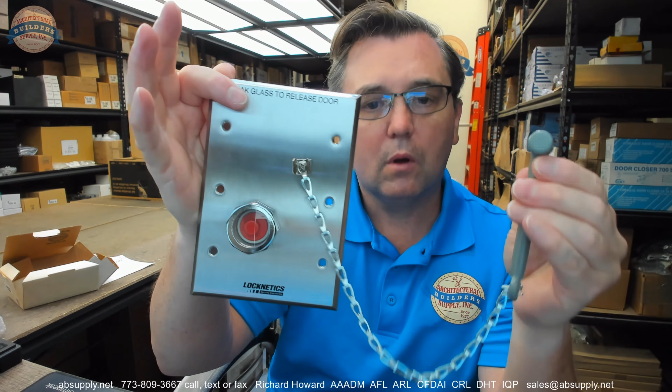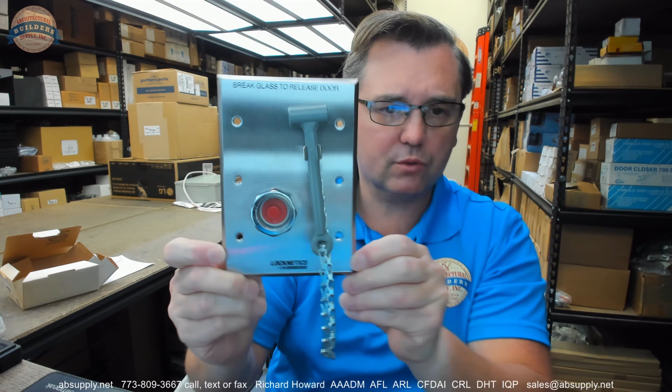Yeah, there'd be no trouble with this breaking that glass. It's a lot heavier than it looks, that's for sure. I can't really say how much force it would take to break that, but nonetheless. There it is. Break glass to release door. We'll snap the hammer back in place. The hammer and the chain are not available replacement parts. I've had that question in the past. The break glass, however, you can purchase, and I believe it's sold in a package of 5. Okay, right there.

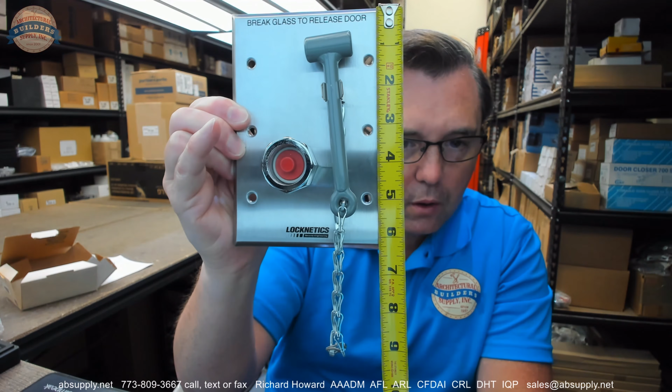Now, let's take some dimensions of the unit itself. That's 6 3/8, about 4 1/2 or so. It's going to be obviously a very similar, triple gang box sort of mount that you're going to use for this. So typical and common material. Now, the rest of the components that are here, I don't believe I showed you the back. We're going to go over the wiring diagram in a moment as well.

Okay. Now the balance of the components that are included here are going to be screws for getting everything attached. 6 of these machine screws for attaching the unit to the gang box. We'll put the material back in. There are only 3 break glasses here. I would have to assume that that's what's standard, even though a replacement pack will have more than 3. Again, I believe it's 5.

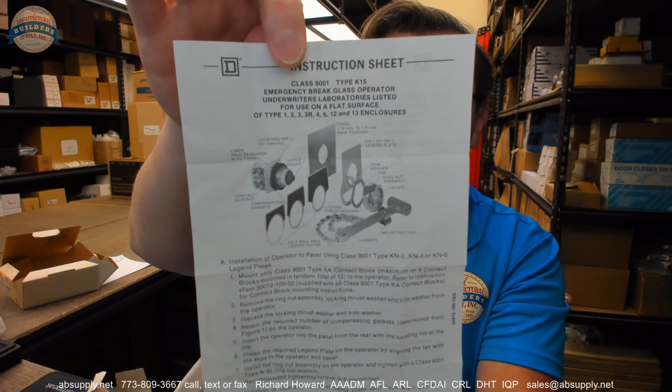Included is an instruction sheet on how to service the break glass, which is also linked to down below in this video. It basically involves unthreading the nut that's on the outside here. That's all that servicing really requires. Yep, that's it. Your break glass is here, and that will come out. Takes a little bit of force to thread it on because that switch is spring-loaded and underneath the glass. So that goes back together nice.

Okay, so let's switch now to the screen view where we can take a look at all of the supporting documentation. Okay, so here's the item that we are looking at. The Locknetics 740. You can view the other options as well. 740, 741, 742. Okay, so the 740. Surface mount in a standard 3-gang enclosure. So typical, sort of industry standard material that this will bolt to. Compatible with all fail-safe type electronic locking systems. An effective alternative to a standard pull box.

Let's back up to this. Compatible with all fail-safe. So what's happening here is, if you recall, I said that button was under tension. So as I rotated the nut to get to the break glass, the button came out. So what's happening is the glass is actually keeping the normally open switch in a closed position so that there's continuity through the circuit. But as soon as you break that, that's going to fail safe or open the circuit. So it's a normally open circuit.

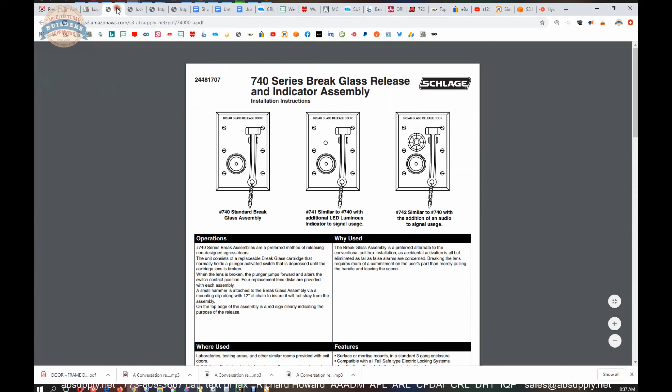The small hammer is attached to the break glass assembly via a mounting clip with a 12-inch chain to ensure it does not detach from the assembly. So there you go. So we have series instructions, and then there are additional instructions also that we'll be able to review. And let's go through them one at a time. There should be 4 documents. So the installation instructions, the 740 series,

this is all a review of what we just discussed. Why used? We just discussed that as well, but it goes on to say that the break glass assembly is a preferred alternate to the conventional pull box installation, as accidental activation is all but eliminated as far as false alarms are concerned. Breaking the lens requires more of a commitment on the user's part than merely pulling the handle and leaving the scene.

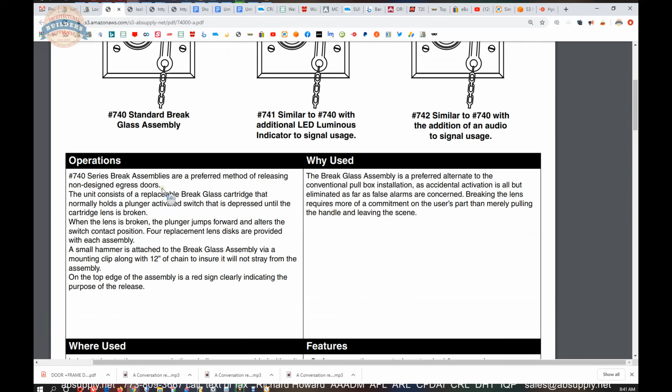Where used: laboratories, testing areas, and other similar rooms that are already provided with exit doors. Fail-safe multiple door interlocks, where in the event of an equipment malfunction, incorrect usage, or wiring, someone may be trapped between doors. Okay, so that's where the 6 amp comes in, because it's rated for lots of amperage, because you could be controlling multiple doors that have magnetic locks.

Features surface or mortise mounts and a standard 3-gang enclosure. I don't know of a mortise mount there, and that's because I'm not very familiar with the world of electrical components. There must be some sort of a surface mount box that would be a standard triple gang is what I'm driving at. I'm not aware of Schlage or Locknetics having any surface mount option.

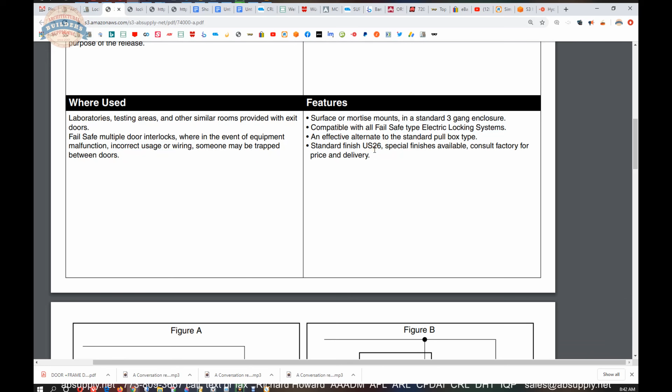An effective alternative to the standard pull box. Standard finish is US 26. That's a typo. This is US 32D. That's satin stainless steel. Special finishes available. Okay. I've never heard of it, but I'm sure that with a volume they'd be able to do it. Here's your wiring diagram.

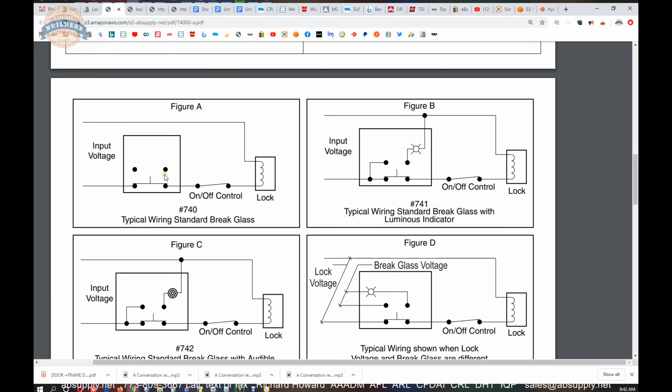A typical wiring, standard break glass. That's when the unit is in its condition when you take it out of the box. When that glass is broken, that's going to switch over to this pole here. You can see how the configuration of the switch is the same for the most part. What I mean is in the 741 and the 742, when that fails, it will fail to the LED or the annunciator option. Typical wiring shown when lock voltage and break glass are different.

Okay, so what they're saying is when you have a voltage of your lock, that's not going to be the same voltage as what it would take to operate the LED. I can't think of a lock that would really require that, except if you were dealing with something that was line voltage.

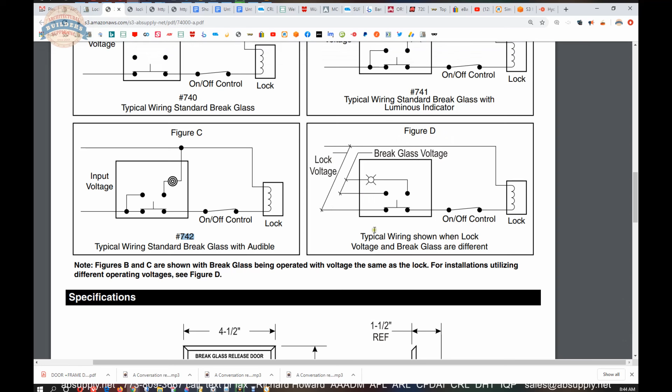But that doesn't make sense because this will handle up to 240 volts, I think it said. Must be something, or maybe AC. I'm grasping at straws on what that would mean, so I apologize. Dimensional properties.

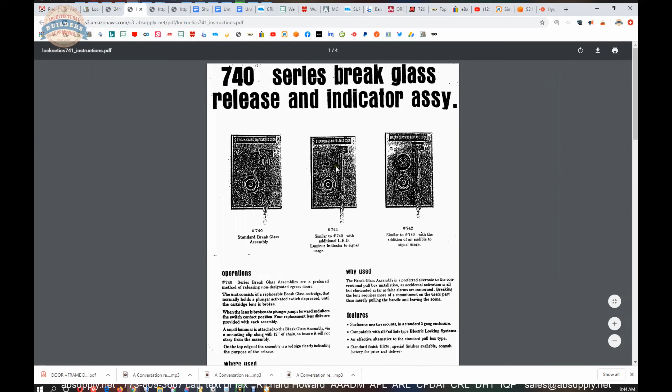Now the next document is going to be an older set of installation instructions. This is probably from the late 1990s, would be my guess. I don't see a year here at all.

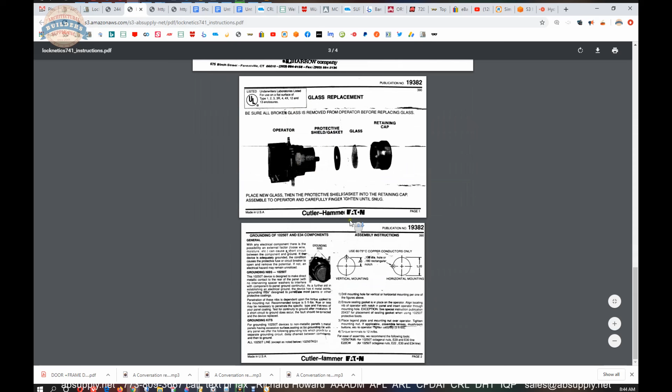The servicing of the break glass is here in just a different fashion. I have a little clearer example. This is possibly even an older set of installation instructions. So years ago, they apparently did have a surface mount box right there. I don't know if they still offer that. Let's take a look.

And I'm pulling up... this is actually a handy tip. Manufacturers, and then we're going to look for Schlage Electronics. Control F, then Schlage Electronics. And that part number, which I'm sure is quite dated, 7903, would be a standard surface mount box. 7903.

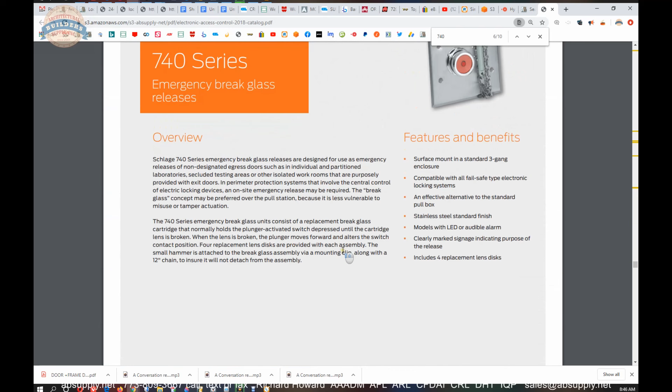Access control catalog. So the 740... Well, they don't. There's not much here on that. Yeah, they don't indicate any sort of a surface mount box available. 7903, yeah, that doesn't come up.

So I'm going to think that that's a throwback to a time when it was once available. Okay, so we'll have to skip over the idea that the manufacturer provides that surface mount box. But triple gang is obviously what you're looking at.

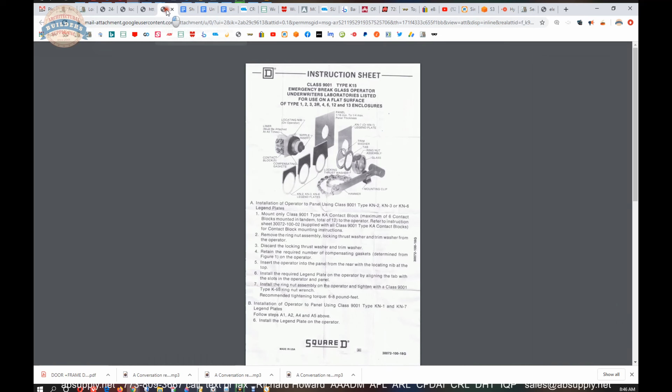Now, the servicing of the break glass is detailed here. This is obviously from the manufacturer, Square D, who makes the switch and the assembly. Should you need to have greater detail on all this, you clearly want to not modify anything here. Nut comes off, glass comes off. Make sure nothing else changes. And I won't read all that to you. It's all, I believe, straightforward.

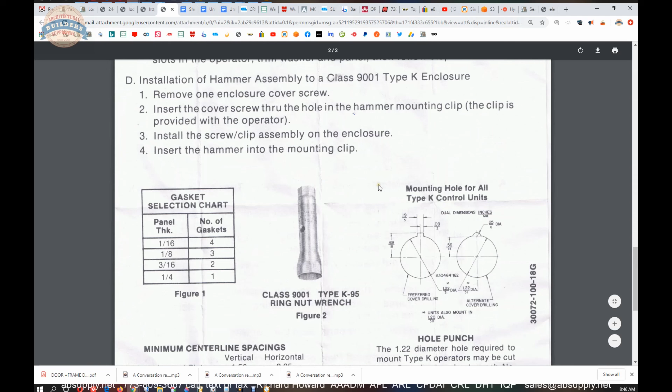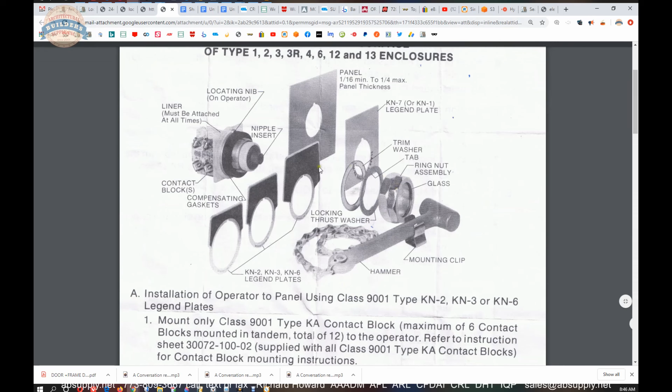Who would have thought there's a special tool for that nut? Mine came off with just hand tight. So that wraps up all the installation instructions on the 740 series.

Now there's a link here. I took you to the Schlage Electronics link, and that's the branding that Schlage, or Locknetics, has phased into. When you call their phone number, they still call it Locknetics, and I think they dusted off that marketing name a couple of years ago because personally, I believe it's a highly recognizable name when it comes to access control hardware. But the name Locknetics, that manufacturer's page is here.

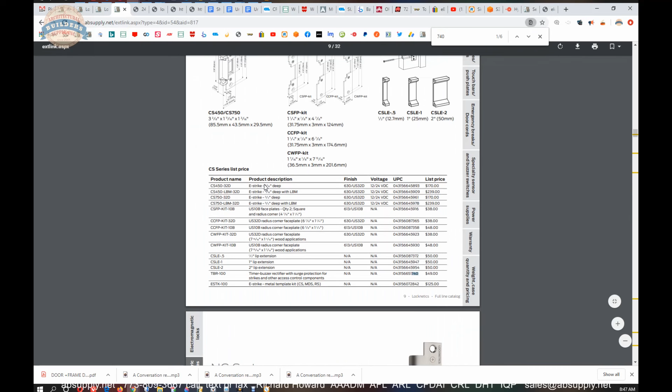Two different sets of information, and you can see that there are current catalogs. So let's take a look, see what they show for the 740 in the most current catalog in Schlage Electronics, or pardon me, Locknetics.

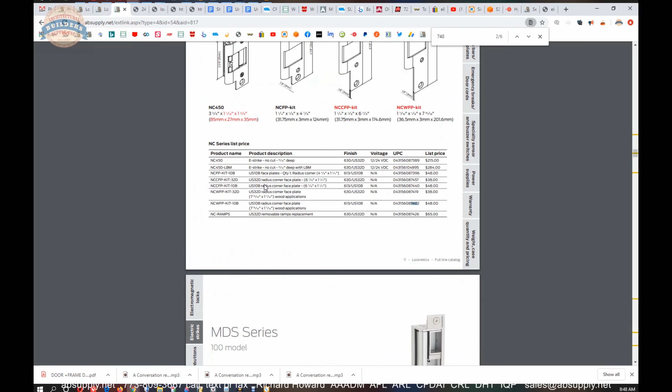Yeah, I don't see it listed here in the book. That's not unusual for it to kind of just fall off, you know, things get moved around. But the point of showing you the Locknetics page is we have an old, what I call an archival catalog here, and then I have...

Schlage Locknetics catalog. Now I use the Schlage Locknetics catalog because what we get into a lot are the electromagnetic locks that are all discontinued. The 390, the 350, the 320, and the variants of all those electromagnetic locks.

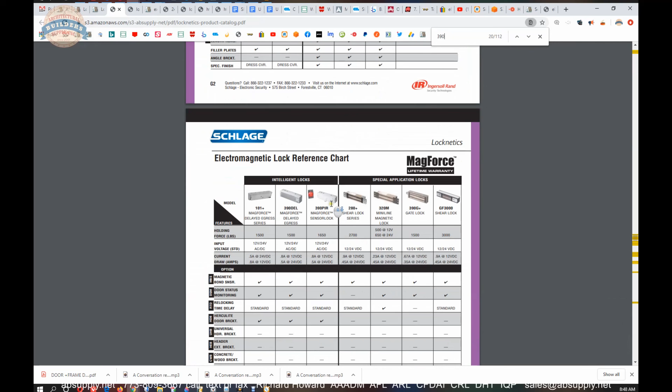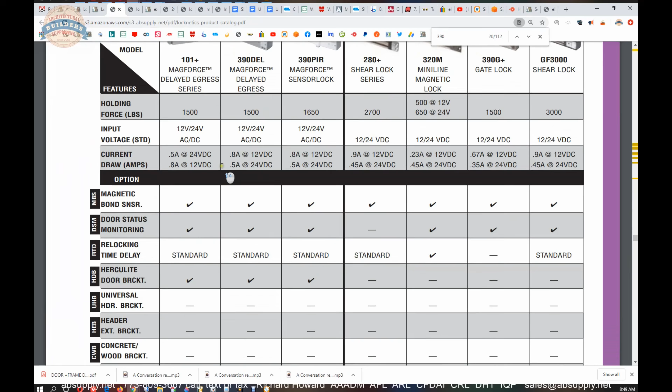It's nice to be able to, a client will call and say that they have a 101 plus, a delayed egress, and it's nice to pull up the old data to determine what was the feature profile and how do you convert that to something modern. So that's why we endeavor to keep as much of this old information as we can, because we're able to convert it to something that the client can actually get their hands on.

Let's wrap up this video on camera.